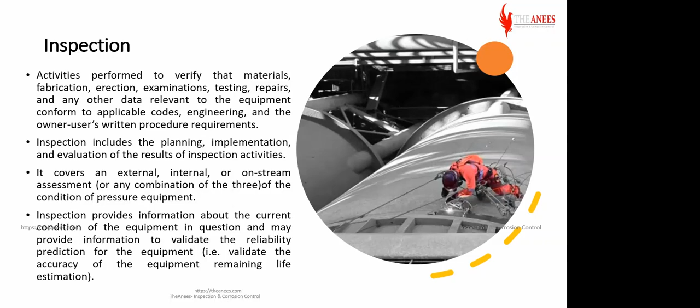So what's the purpose of inspection? Inspection provides information about the current condition of the equipment in question, and also provides information to validate the reliability prediction for the equipment during its service, because we have to understand whether our equipment is safe to put into further service or not. By gathering the results of inspection, we can verify or estimate the equipment's remaining life. So this is in general the definition of inspection. So why do we need to inspect pressurized equipment? This is the question on the table, okay?

Sometimes you are in a meeting with your department and some people ask you this question. So how could you reply? In fact, first of all, the purpose of the inspection, or in-service inspection, that we are talking about is to determine the physical condition of the fixed assets and determine the type, the rate and the cause of damage mechanisms, and also the associated deterioration that came from that.

What comes with that damage mechanism, and what will happen, or also what's the condition of our equipment, is it okay or not, and also to find out, as I said before, whether it can be put in further service or not.

Another purpose is to identify the damage that could result in process safety incidents, such as loss of containment. Here we are talking about what's inside the pressure vessel or tanks, whatever fixed equipment we are talking about, okay? Because sometimes some equipment contains toxic fluids, some of them may also contain flammable fluids that may ignite if they catch any ignition source, as well as there are some environmental hazards.

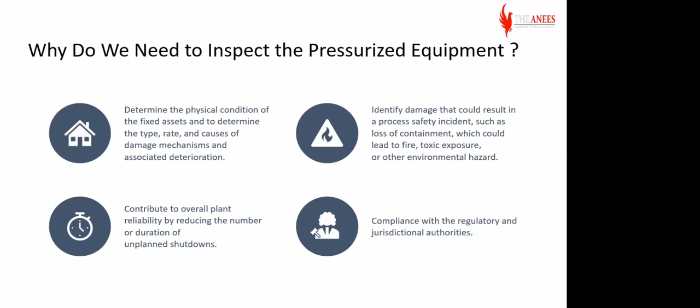So another part of our definition of RBI, risk-based inspection. We talked about inspection, and now we are talking about the risk. What's the meaning of risk? Risk is the combination of the probability of an event and its consequences. In some situations, risk is deviation from the expected. When probability and consequence are expressed numerically, risk is the product. The risk, that's a probability, okay?

Probability means a potential event that may happen and may not happen, and it has some consequences after it happens. Those consequences are sometimes adverse and sometimes positive. So numerically, as an equation, risk equals likelihood multiplied by impact, or, as we are talking about RBI, probability of failure multiplied by consequence of failure. We are going to discuss that later when we talk about the implementation of an RBI program.

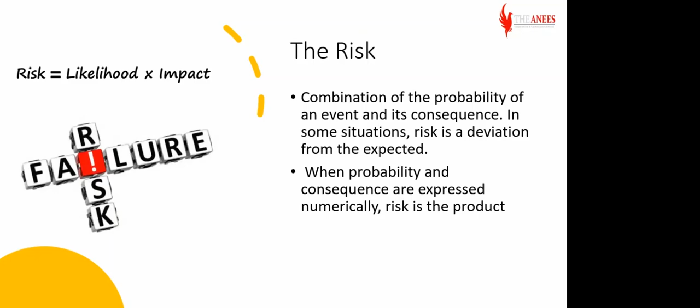So, the evolution of inspection intervals. Inspection intervals have evolved over the last century up to date. From the 1950s, the concept of maintenance, because there is some relation between maintenance and inspection, was a strategy called reactive maintenance: don't fix it, just keep it until it breaks. Or there's another strategy called run to failure.

At the beginning of the 1970s, companies started time-based inspection with fixed intervals for pressure equipment inspection, like every 2 years or every 4 years. And as I know, some companies are still using this strategy now. Within the 1990s, with the evolution of API inspection codes, the strategy of half remaining life, or condition-based inspection, even non-intrusive inspection, started to be popular, with the evolution, as I said, of 570 for piping, 510 for pressure vessels, and 653.

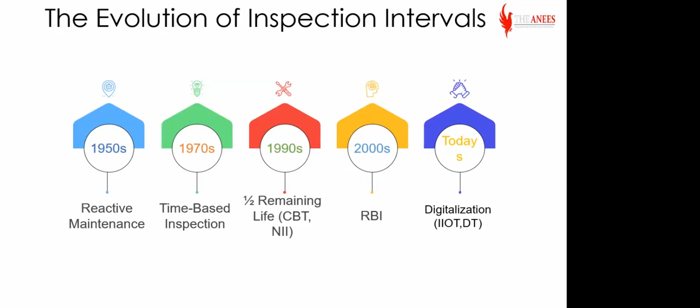Now we are going to discuss our main topic. It is risk-based inspection, RBI. RBI, in fact, is an analysis methodology and process that is opposite to condition-based inspection. That's what I was talking about, related to the half remaining life strategy, like 10 years or half remaining life, and so on. That's what is included in the API inspection code.

So RBI requires qualitative or quantitative assessment of the probability of failure and the consequences of failure. In fact, the main output from an RBI system or RBI program is the inspection plan. How could you generate this inspection plan? It depends on the probability of failure of the equipment.

I'm going to discuss what's the meaning of probability of failure, and how you could calculate it, and the consequences of this failure. So the most important thing is to generate an inspection plan to cover all of these factors, okay?

so that's the probability of failure. It depends on the damage mechanism, and the consequence of failure associated with each equipment item, piping circuit, or storage tank in a particular process unit.

Anyway, what's the difference between RBI and condition-based inspection? In fact, RBI estimates that around 80% of the plant risk is isolated in only around 20% of its assets. This concept, or principle, is called Pareto. Pareto is an Italian scientist. He invented this principle, which states that for many outcomes, roughly 80% of the consequences come from 20% of causes.

The principle of RBI is like this. Why do we need to inspect all our equipment? Why do we need to spend all of this money? Why do we need to shut down our plant for a long time to check, inspect, or verify the condition of our assets, while not all of them have the same importance for us? Importance here depends on many factors: business, production, environment, safety, regulation, and so on.

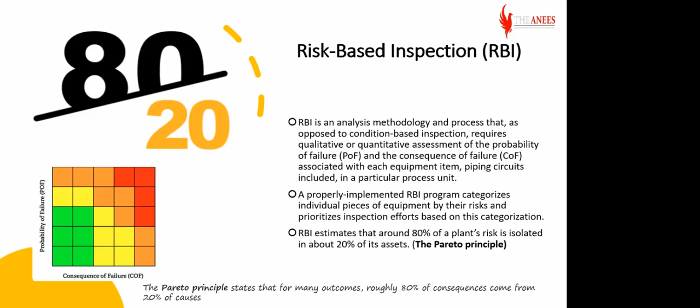So what is the general approach of RBI? The general approach of RBI asks what and where to inspect, because when we go to the RBI program planning, or the process map for RBI, we will understand the meaning of that.

What and where to inspect: RBI determines the inspection scope and prioritizes the components or assets whose damage mechanisms concern our business, or will affect our production, environment, or safety. So it is like focusing on the most important equipment.

Then when to inspect: another mission of the RBI program is to determine the inspection interval. How to inspect: this is another purpose of the general approach of RBI, to determine appropriate inspection methods.

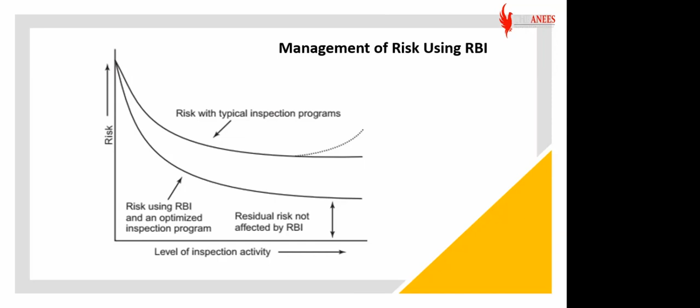Okay, so what are the benefits of an RBI program? As we said, whenever you identify the most important equipment for your business, you will increase the facility availability. That means your facility is operating smoothly and for a long time. We can explain this in the case study in the next slide. And also improved or sustained equipment reliability.

Also focused inspection on high risk equipment. It doesn't mean we ignore other equipment, but we can make another strategy for them by on-stream inspection, maybe to expand the inspection interval, not like what we were using in the time-based inspection strategy or condition-based inspection strategy.

Shorter and fewer facility shutdowns. Yeah, because this way we are not going to shut down every 2 years, or some companies are doing it every year. So this is one of the benefits of an RBI program.

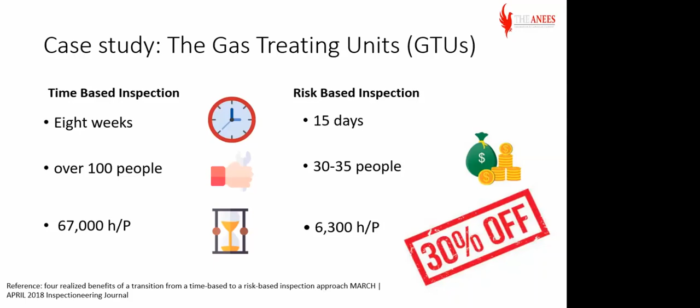So this is a case study, and whoever is interested can go to inspectioneering.com and find this article. It is very useful to read. Okay. So

What are the RBI standards and recommended practice references? As I know, API, the American Petroleum Institute, started with this methodology by generating API 580, risk-based inspection. This reference explains the general methodology: how you calculate RBI, how you calculate the consequence of failure and the probability of failure. All of these rules and guidelines are in API 580. API 581 is the risk-based inspection methodology, related to the quantitative approach.

Also, there is ASME PCC-3, DNV RP-G101, and also the European Commission released RIMAP, risk-based inspection and maintenance for European industries. As I know, these are the available standards and recommended practices related to RBI.

So what equipment is covered in an RBI program? As we talked before, this is related to fixed equipment. RBI covers pressure vessels, all pressure containing components, process piping, storage tanks, and pressure containing components of rotating equipment, not the rotating equipment itself, such as intercoolers and pump and compressor casings. Boilers and heaters, heat exchangers such as shell, floating heads, channel and bundles, as well as pressure relief devices, whether PSVs or relief valves, are all covered.

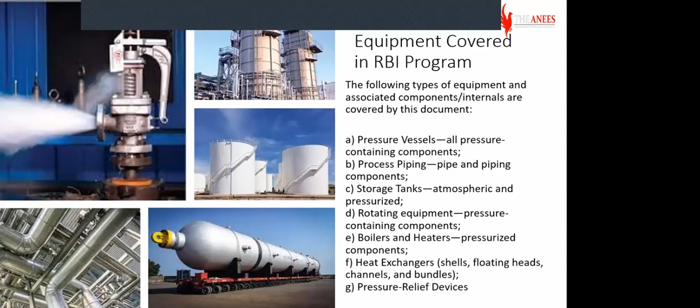So the types of RBI assessments. RBI assessment has three approaches. First, the qualitative approach. It is based on engineering judgment, or the experience of subject matter experts or RBI specialists. This is the basis for analysis of probability and consequence of failure. It depends on the subject matter expert, versus the quantitative approach. The inputs are given in data ranges, not discrete or accurate values like the quantitative approach.

The results of the qualitative approach are typically given in qualitative terms such as high, medium, low, for both probability of failure and consequence of failure, or sometimes high, medium-high, medium, low, or significant, dangerous, risky. Even though numerical values can be associated with these categories, the qualitative approach usually uses these terms.

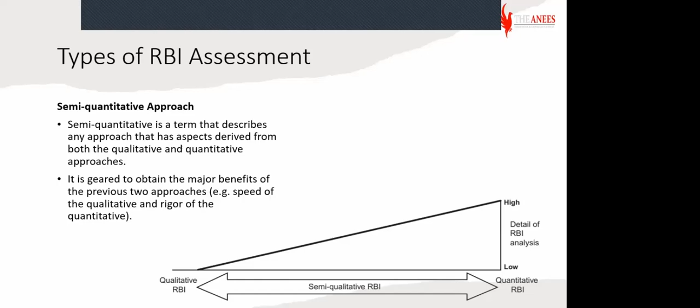So, implementation of risk-based inspection program. How could you implement your program? This planning process started with the data and information collection. The most important thing is the first stage. You have to collect the data, and also you have to validate this data as well, to check the quality of this data and also information.

Once you find the data that you collected is enough, you can start with the second stage, that's the risk assessment process. As I said before, the risk depends on the probability and consequence of failure. Once you find the risk, you can make a risk ranking. Upon risk ranking, you can generate an inspection plan, even a mitigation plan, if any, and it will be continuous

development as reassessment. Once you make an inspection campaign based on the inspection plan generated by the RBI program, you collect all the information from inspection, and you have to validate the potential or suspected damage mechanisms. Sometimes you put some potential damage mechanism on equipment, and upon that you identify the suitable inspection technique to be used, and also the location and extent of inspection.

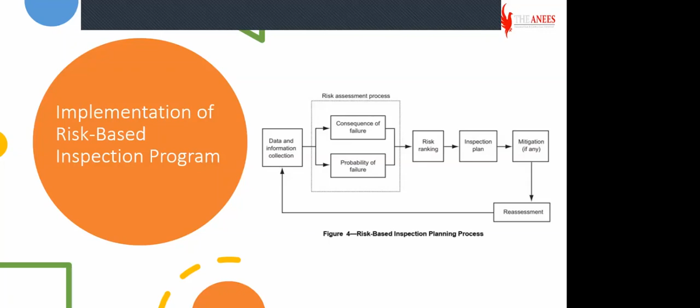Upon this reassessment or continuous development, you are going to put in this data, and the inspection plan is supposed to be revised or updated. So the first thing for any initiative or project is that you have to make your team: together everyone achieves more. That's the meaning of team.

So what's the RBI team? In general, the RBI team consists of a project manager, sometimes called RBI champion, who is supposed to have leadership skills and also good experience and understanding of RBI methodology, and preferably be API 580 certified. Also area or unit inspector, process engineer, RBI or reliability engineer, operations representative, one, two or three depending on the facility size, and materials and corrosion engineer.

And it is not only these people; you can add another to be involved as a risk analyst, okay? Sometimes you can find companies where the unit inspector and RBI engineer are the same position. Anyway, it is not fixed, it differs from company to company. Also sometimes companies hire outsourcing, like a subject matter expert from a contractor, to generate or establish this system.

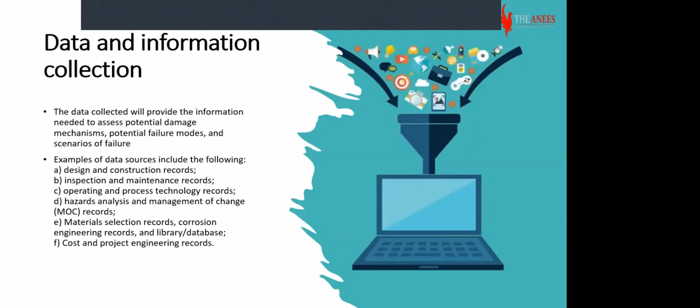Okay. So data and information collection is the first stage in the RBI program. Examples of data sources: design and construction records, inspection and maintenance records, operating and process technology, hazard analysis from things like HAZOP, project material selection records, corrosion engineering records, library, database, cost and project engineering records. All of this data is needed for RBI implementation during the first stage.

Typical data needed for RBI analysis may include but is not limited to the following: type of equipment, materials of construction, inspection, repair, and replacement records, process fluid composition, inventory of fluids, operating conditions. Inventory of fluids here is also most important for the consequence of failure, operating conditions, safety systems, and so on, coating, cladding, equipment replacement costs, environmental remediation costs.

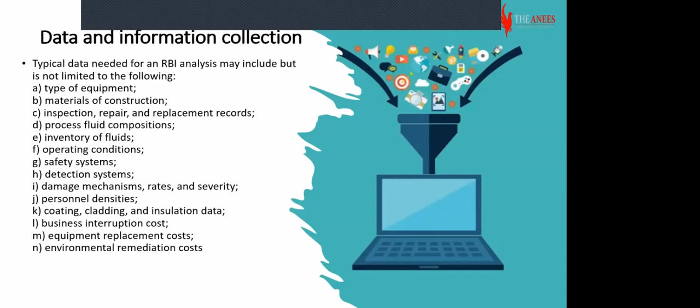Another stage or another phase of RBI implementation is probability, sometimes called likelihood, of failure. Probability of failure is the likelihood that the piece of equipment will fail or lose containment due to the damage mechanism at a given time. Probability of failure is related to time, okay, and expressed by time or number by time.

Probability of failure is calculated for individual pieces of equipment by looking at the potential damage mechanisms, which you can find from all that information you gathered during the first stage, as I told you, that it could be susceptible to, and general frequency of failures and management system factors. All of these are calculated, the POF, probability of failure, is calculated.

Actually, there are other causes of damage or failure or loss of containment not related to the damage mechanism, like seismic activity, weather extremes, sabotage, design error. That sometimes happens, or the design is not properly inspected during fabrication. Or sometimes substitution of material of construction. You asked for something and you get another thing, okay? This has happened actually in carbon steel and low alloy steel, okay?

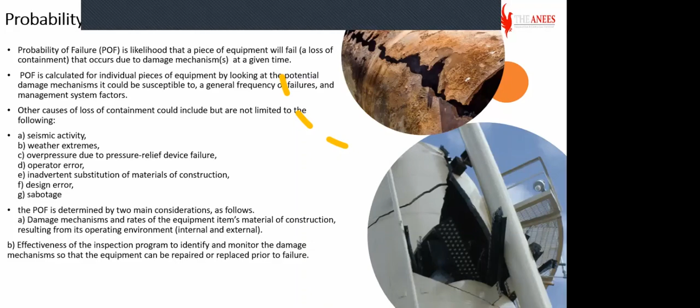So the probability of failure is determined by two main considerations: damage mechanisms and rates of equipment items' material of construction resulting from its operating environment, that's the damage mechanism and the rate of this damage mechanism, and effectiveness of the inspection program to identify and monitor the damage mechanism. So these are two factors: damage mechanism and effectiveness of the inspection program, and this is one of the factors included in your RBI implementation, okay?

So for units of measure, you could use these three levels of POF, low, moderate, high, or possible qualitative rank. This is for qualitative. Or it can be the annual probability of failure, less than 0.001, or between them, something like this. This is something you can calculate numerically, okay? And also there is another thing, six levels of probability of failure; as I told you before, in qualitative, you can just express it in terms like this: remote, very low, low, moderate, high, very high.

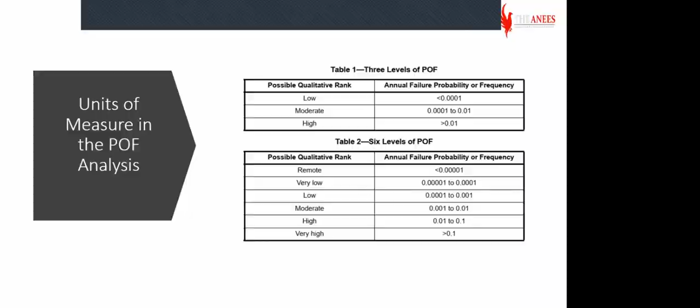Okay, consequences of failure. It is another part of the risk equation, what is called COF. It is calculated by reviewing and ranking the potential consequences for the equipment, personnel, and environment in the event of equipment failure. This part of RBI calculates the potential consequences. What hazard, what effect, what impact on the environment and the personnel, even the company business, once the equipment fails. So by this calculation, you can find whether it is high, low, moderate, and so on.

Okay. COF provides discrimination between equipment items on the basis of significance of potential failure, and consequence analysis should be a repeatable, simplified, credible estimate. Also, consequences should typically be categorized. They are categorized as safety and health impacts, environmental impacts, economic impacts. That's what we are talking about. Sometimes the failure of the equipment may shut down your facility, and every day equals money.

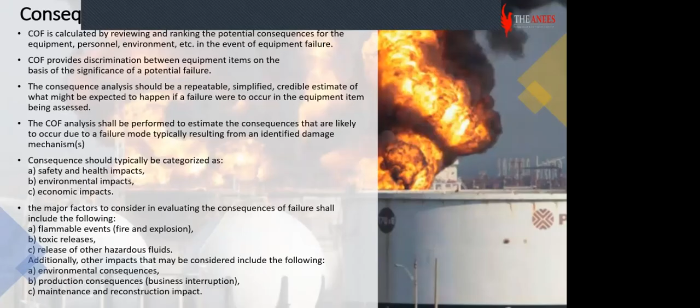So like these 6 levels: catastrophic, major, serious, significant, minor, insignificant. And also there are another 3 levels for safety, health, and environment consequences. And the high level, like safety consequences, such as maybe any loss of containment or release of the containment can consequently cause fatality or injury of permanent disability. Maybe in the high level it causes long-term health effects, and so on.

Okay, as well as for the consequences of failure for catastrophic, large number of fatalities. Category 1 or 2, major, like few fatalities, and or major short-term environment impact, and all of these units of measure in consequence analysis.

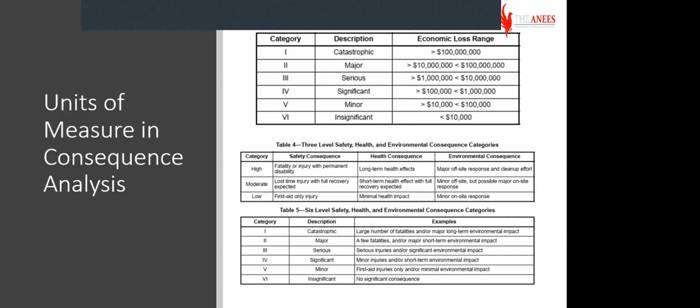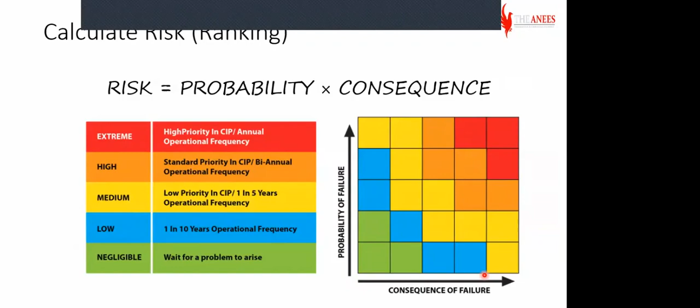Calculate the risk ranking. As I said before, risk equals probability multiplied by your consequences, expressed like this, and also expressed like high, medium, low, negligible, and so on. So actually the risk here, as we can say, goes diagonally. Here from the low risk or negligible risk and goes up to the high risk. Here you can find consequence of failure, probability of failure.

So as I said before, the output of RBI assessment is the inspection plan. The inspection plan will explain all concerns, as I said, extent of inspection, which NDE or which inspection techniques you have to use. Also, it identifies risk drivers, inspection methods that should be used, extent of inspection, percent of total areas to be examined or specific locations, inspection intervals or next inspection date, other risk mitigation activities like CP or cathodic protection,

using chemicals, corrosion inhibitors, and also the residual level of risk, as I showed you in the beginning in the graph, that there is still a residual level of risk after inspection and other mitigation actions have been implemented.

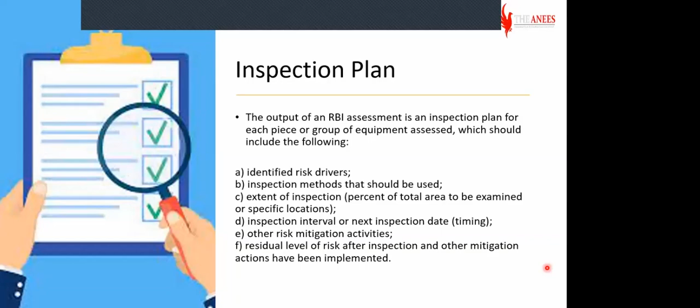And the last stage, as we talked about, is reassessment, or it is also called evergreening. But reassessment is about fully revalidating your RBI system. Evergreening is what I was talking about, that you check and you find some other places to be inspected, or you detect some deterioration outside the estimated locations during the RBI. But reassessment is a complete reassessment, such as after significant change, like process conditions, or an amount of time set by the governing inspection code and jurisdictional regulation.

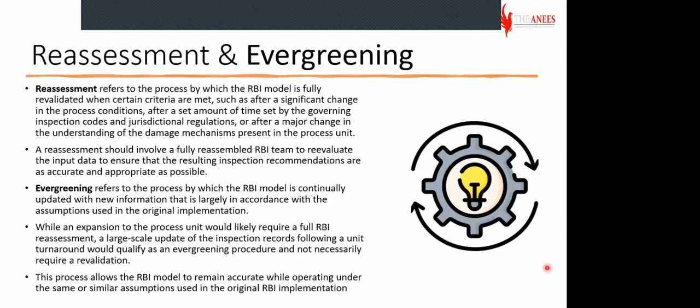Okay, so this is our main topic, guideline for selecting the right RBI software. Once you start to think about implementing an RBI program, firstly you have to think which approach you are going to adopt. If you are going with the qualitative, and that's what many companies do, they start with the qualitative, after that go to semi-quantitative and so on. Or with progress, they shift to quantitative. In fact, all of these approaches need software, but you know, software means money. That's what you have to think about.

So the first thing you have to understand, or think about before starting to purchase software, is business needs. What are your business needs? Identify your business needs. Are you going to cover all your plants? Are you going to only cover the plants that are important for you? That's what you have to think about.

And also, identify key stakeholders in your RBI program: executive management, inspection teams, maintenance, operation teams. Will all of these be included in the software or not, because some vendors offer a limited number of users. For that reason, you have to think about that. Will all stakeholders be involved in your program or not? So the first thing is to know or understand your business needs, what you expect, what you have to keep in mind before selecting the software.

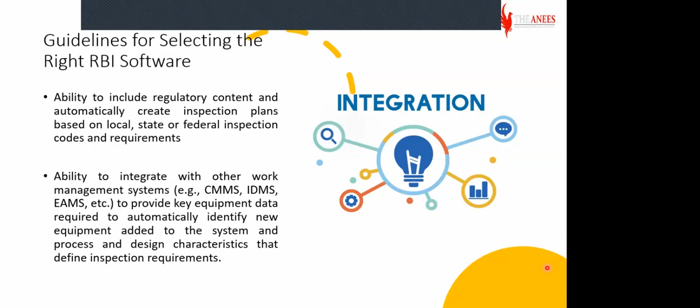Okay, ability to integrate with other work management systems, such as computerized maintenance management system, inspection data management system, and enterprise asset management system, etc. So there is supposed to be some integration. Can the software you are going to purchase be integrated with your existing work management system or not? Okay. Because sometimes if somebody in the CMMS adds new equipment, this equipment is supposed to be added also in the new RBI software.

Ability to configure RBI tools to perform your own consequence calculation and model the damage mechanism. This software can make self calculation. Ability to support the changeover, like you started with the qualitative approach, and after a while you decide to shift to semi-quantitative or quantitative. So this RBI software is supposed to be able to shift to these approaches. Also, ability to handle big data.

So many suppliers now offer RBI software that is web-based, still better than server-based. So I think it is still better to be web-based. And at last, financial matters: the cost of the software, and also the license fees, installation, also the training, because that's another factor. You have to ask your software provider, is there any training, and will this training be advanced or cover all disciplines in the software or not, and so on. Number of users also depends on financial matters, and also maintenance fees once any problem happens with the software.

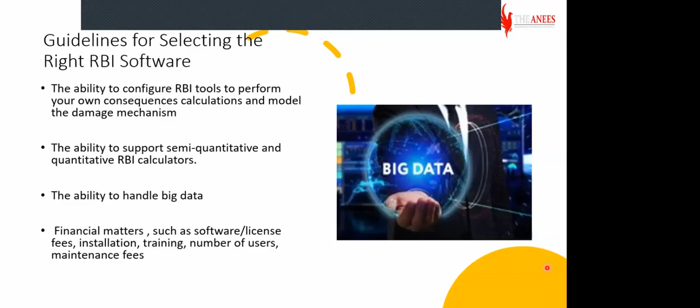So my reference is inspectioneering.com, and also API 580 and API 581.